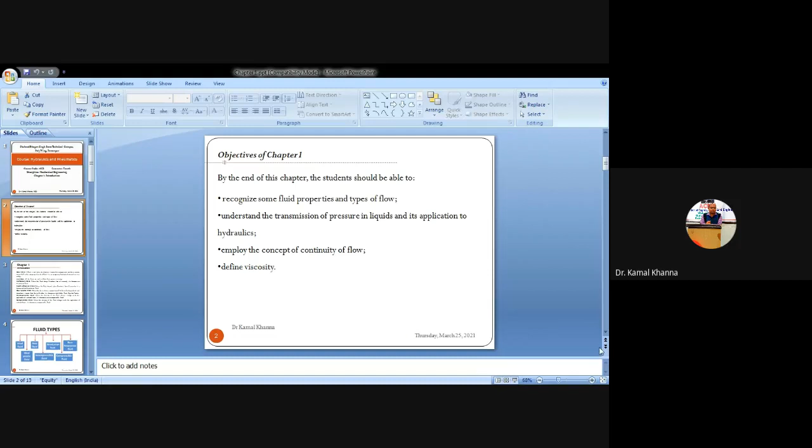So coming to the introduction part of chapter 1, first we will discuss different kinds of fluids which are available in the universe. So we have ideal fluid, real fluid, Newtonian fluid, non-Newtonian fluid, ideal plastic fluid, incompressible fluid, and compressible fluid. These are some kinds of fluids which are available in the universe. So the scientists and engineers have categorized the fluids in different categories.

Whenever a fluid cannot be compressed and has no viscosity, this fluid is called an ideal fluid.

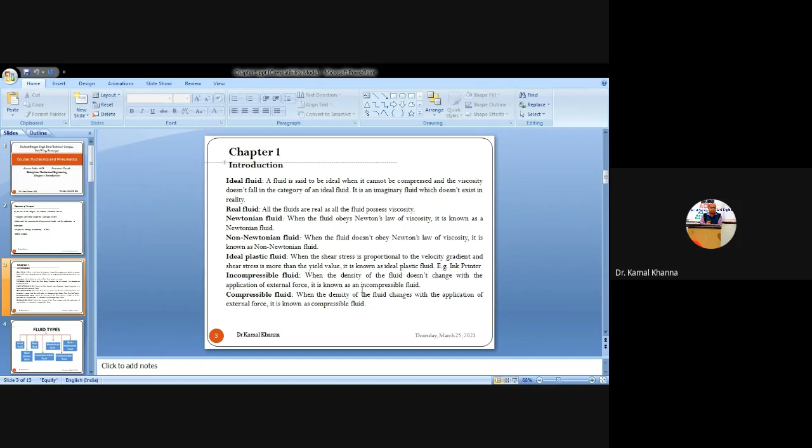All fluids are compressible. They can be compressed by external force to some extent, because after compression, we all know that there is some increase in the pressure of the fluid. So if you are increasing the density and the pressure of the fluid by applying the external force, then that fluid is known as the compressible fluid.

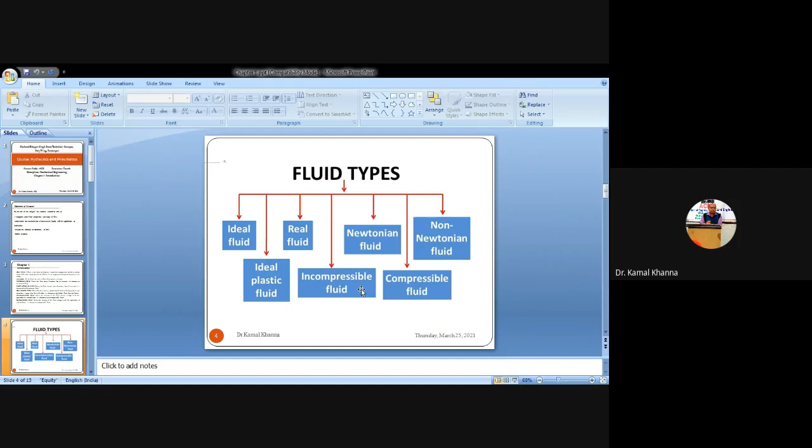So you can see these are the fluid types we have read in the previous slide also. I have a classification chart also. So we have ideal fluid, real fluid, non-Newtonian fluid, Newtonian fluid, compressible fluid, incompressible fluid, and ideal plastic fluid. So this is the comparison of different kinds of fluids available in the universe.

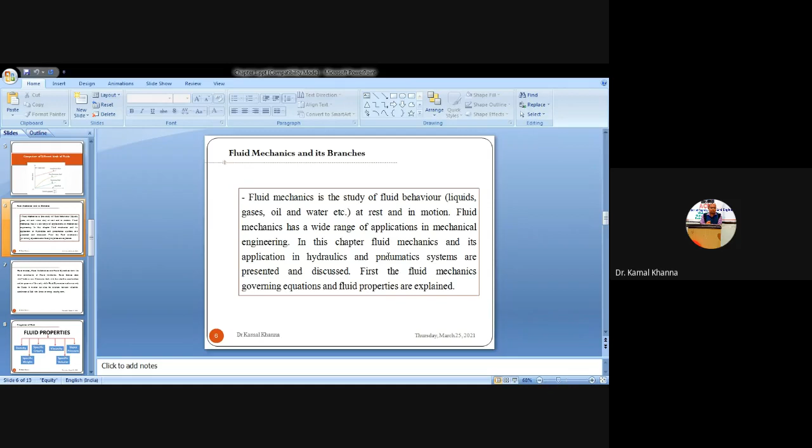If I call it viscosity, if I call it compressibility of a fluid, you can easily understand what I am talking about in the coming chapters. So in the first chapter you must understand all these fluid properties which we read in the coming slides. So fluid mechanics is basically a study of fluid behavior when the fluid is at rest or in motion. Engineers have categorized fluid mechanics in three branches. First one is statics, second one is kinematics, and third one is dynamics.

So fluid mechanics is basically divided into three branches. First one is statics, second is kinematics, and third one is dynamics. So we are having three constituents of fluid mechanics. Fluid statics deals with the fluid when it is at rest. Like you have filled water in your water bottle, you have filled gas in your gas cylinder. The study of the fluid when the fluid is at rest is called fluid statics.

ठीक है, जब fluid rest पे है, like you have filled water in your water bottle, you have filled gas in your gas cylinder, and you have kept it at rest. So when we study the fluid at rest, that branch is known as fluid statics.

Whereas kinematics deals with the velocities and accelerations and the pattern of flow when the fluid is moving. When the fluid is moving from one point to another point, like in your household, we are having water pipes installed.

Whenever you're transporting the water from the lower level to higher level, or even transporting the water from one point to another point within the house, you study at which velocity the fluid is moving, at which acceleration the fluid is accelerating, and which pattern of flow. We will study different kinds of flow patterns in the coming chapters. We'll have a chapter of flow of fluids. In that chapter we'll study the different kinds of flow patterns.

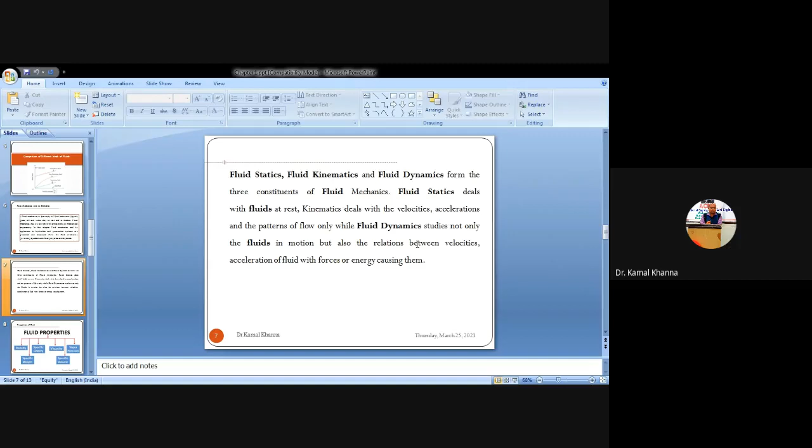These causes, these forces which are causing that motion of flow of fluid, fall under the category of fluid dynamics. So these are some fluid properties which we'll study in the ensuing sections. What is density of the fluid? What is specific gravity? What is specific weight? What is viscosity? What is specific volume, vapor pressure, compressibility, bulk modulus, surface tension, capillarity? These are some properties of fluid which we'll study in this chapter.

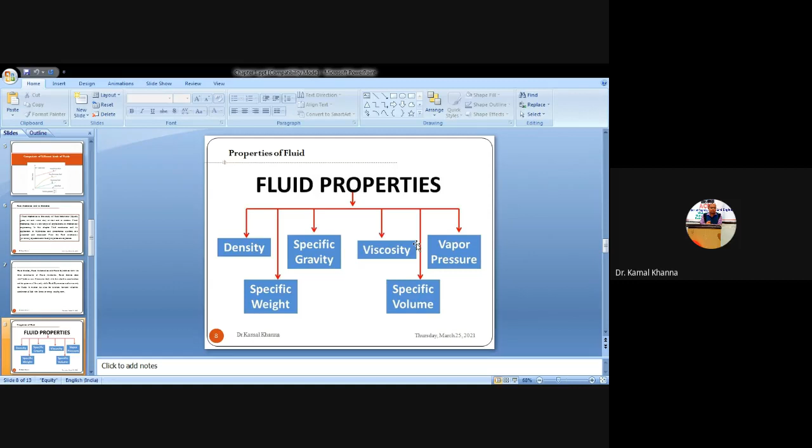And I will quote these properties, that this fluid is having this much specific gravity, this much density, and this much viscosity, in the coming sections and coming chapters also. You just need to understand these fluid properties at this stage, so that you must be familiar with them while I am quoting these fluid properties in the coming sections.

So continuing with fluid properties, the first one is density. Density is calculated from the matter or fluid contained in a unit volume of the substance. It is generally measured as the ratio of mass of the fluid to the volume of the fluid. It is denoted by rho. This symbol, where I'm having the cursor of the mouse, is called rho. So when we have the ratio of mass to volume, it is termed as density.

Next is viscosity. When two solid bodies or fluids are in contact with each other and move relative to each other, a friction force develops between the contact surfaces of the layers of the liquid. As I said earlier, let us say water is moving from point A to B, and it has a cylindrical shape, as that of the pipe which is transporting the water from one point to another point.

Whenever the water is being transported from one point to another point, we have some layers of the fluid, and all the layers are rubbing with each other while moving. So that rubbing of layers between them causes a frictional force that develops at the contact surface in the direction opposite to the motion.

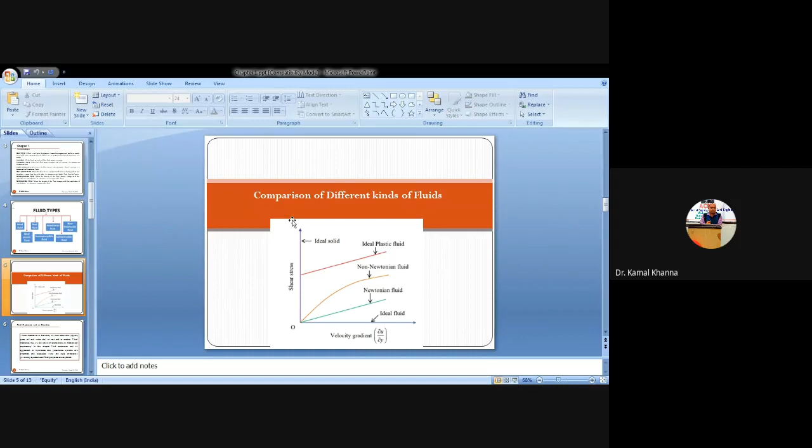So next one is Newton's law of viscosity, which states that shear stress must be directly proportional to the rate of shear strain or velocity gradient. We have seen du by dy in the previous slide also, that is the velocity gradient. I'm coming back to the previous slide. This is the velocity gradient. So velocity gradient is basically shear strain. So whenever the shear stress is directly proportional to the shear strain, we have Newton's law of viscosity, which states that shear stress is directly proportional to the rate of shear strain.

So this is tau, T-A-U. Tau is equal to mu, that is viscosity. That is a constant that removes the sign of proportionality between tau and shear strain. Because shear stress is directly proportional to shear strain, whenever you remove the sign of proportionality and put an equality sign, you have to put a constant there. So what is the constant? Here we have viscosity as a constant between the shear stress and the shear strain. So tau represents the shear stress, that is always a ratio of force to area.

Shear stress is basically force upon area in the case of solids, whereas in the case of fluids we have the pressure of the fluid. So we will always represent shear stress as the pressure of fluid on the area of contact. And next, what is du by dy? It is the shear strain, that is the rate of shear deformation. So the shear stress is directly proportional to the rate of shear strain, that is tau is equal to mu into du by dy.

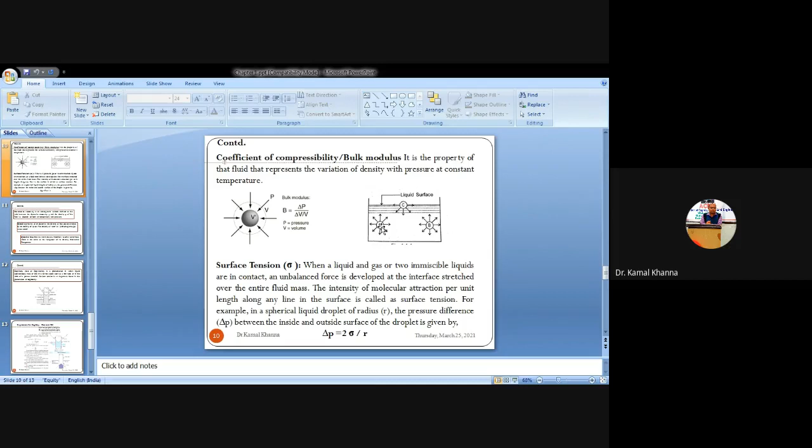So this is a very important property, viscosity, surface tension, in all the syllabus. I will just quote surface tension, and you must understand. You must recall these properties during my quoting in the ensuing sections also. So next properties we are having: kinematic viscosity, specific gravity, and specific volume.

Kinematic viscosity is basically an atmospheric variable defined as the ratio between the dynamic viscosity and the density. Dynamic viscosity is basically the simple viscosity which we have read here also, that is, the resistance to the flow of fluid, denoted by mu. So when we divide dynamic viscosity by the density, it comes out to the kinematic viscosity. It depends on both atmospheric pressure and temperature. So kinematic viscosity is the ratio of dynamic viscosity to the density.

Next is the specific gravity. When you want to find the specific gravity of any fluid, just divide the density of that fluid by the density of water. It will give you the value of the specific gravity. If you want to find the specific gravity of mercury, divide the density of mercury by the density of water. Similarly, for honey, divide the density of honey by the density of water. It will give you the value of specific gravity.

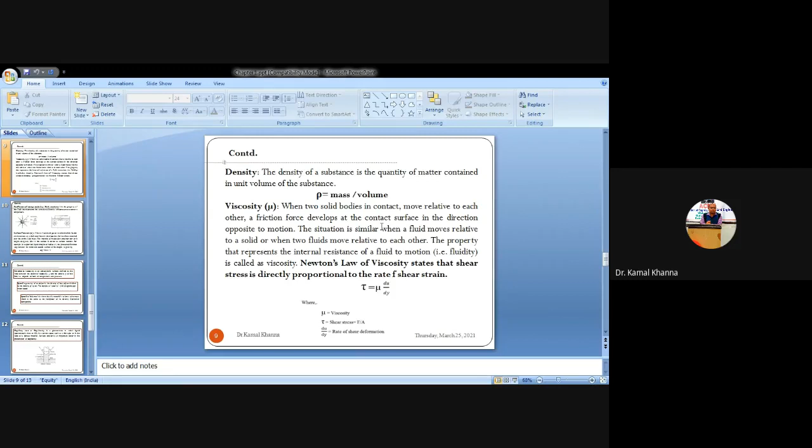Similarly, the next property is specific volume. It is the ratio of a material's volume to its mass. The ratio of mass to volume gives you density, which we read as the first fluid property. But when you calculate volume to mass, it gives you the specific volume of that fluid.

Capillarity is the phenomenon in which liquid spontaneously rises or falls in a narrow space such as a thin tube or in the voids of porous material. Porous material has pores, like the bread in your home. When an empty beaker filled with air is inverted into the reservoir, the water rises into it. The height from the top surface of the container to the rise of the liquid is called capillary rise. So we have an expression for capillary rise and fall.

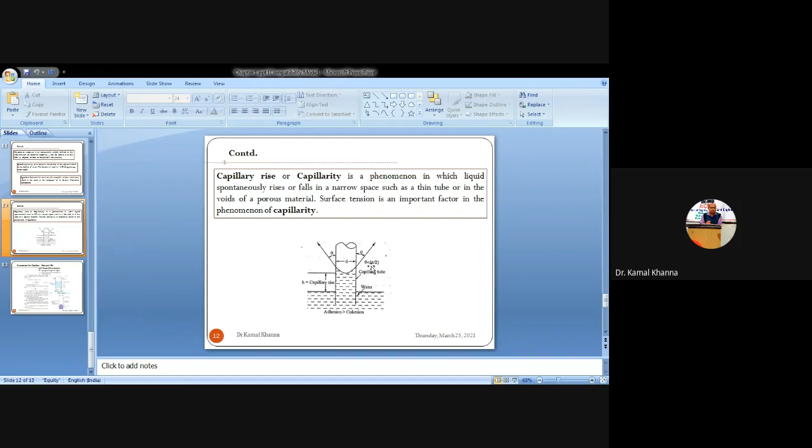So d is the diameter of the capillary tube, theta is the angle of contact over the water surface, sigma is the surface tension we have read in the previous slides, and w is the specific weight. What is specific weight here? It is the product of density into acceleration due to gravity, that is small g. Now upward surface tension force, lifting force, is equal to the weight of the water column in the tube.